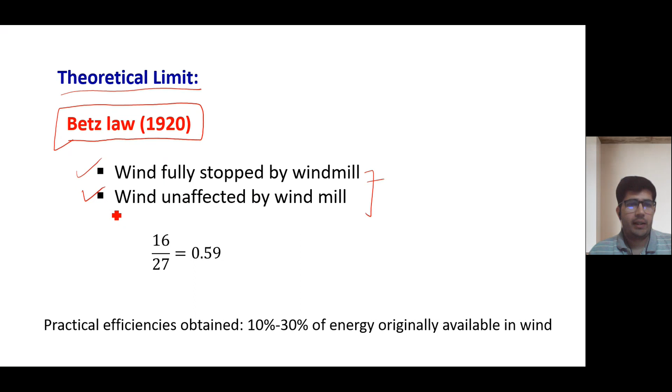So the value is 16 upon 27, which comes to 0.59. So there is a theoretical limit of 59%. Whatever equipment, whatever windmill, whatever the conditions, you cannot get more than 59% of wind energy. Suppose your wind is having 100 watts of energy, then you can only tap off around 59 watts of energy.

So you can only tap off 59% of the total available wind energy, but practical efficiency obtained is around 10 to 30% of the energy originally available in the wind, because we have other efficiencies due to the fan part, the location, and various other things. So this is the maximum; mostly we are getting 30 to 40% efficiency, or sometimes 10 to 30% efficiency.

So it's important, 16 by 27 — it's a very important number, you should remember this. This is called the Betz limit: 16 upon 27, or you can say 0.59. We cannot get more than this efficiency from the windmills, or you can say the wind turbines.

So we know the Bernoulli equation: half rho v square plus rho g h plus p equals constant. Here P is the static pressure. Rho g is again, rho is constant, g is constant, and height is also constant because we are taking the wind at a particular height. This is a potential head. It's a dynamic pressure or dynamic head due to the dynamic term, half rho v square, where velocity is included.

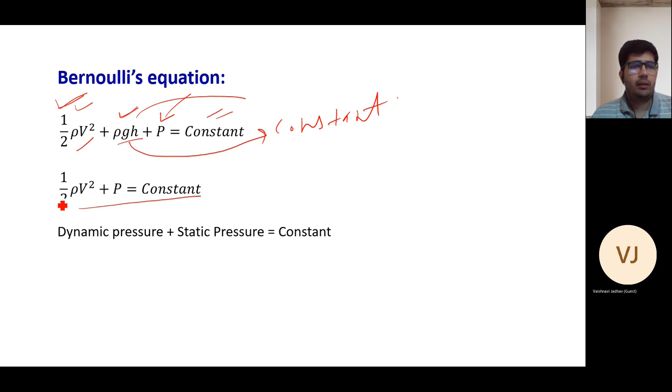So this part equals constant because we are dealing with the wind turbine, so the height is fixed. Rho g h can also be considered constant, so you can transfer rho g h to the right side and merge it with the constant. You will get half rho v square plus p equals constant — the dynamic pressure plus static pressure are constant. This is the basic equation, half rho v square plus p equals constant, for the wind energy calculation.

So further we will see it. These derivations are covered very well in the course class, so for detailed explanation you can refer to the class notes or class videos. We are just briefly looking at the derivation.

So suppose this is a control volume, and here is your blade. This side you can say V1, and this side V2, and these are sections just far behind and near the blade, so it can be considered as infinity — this one also like infinity. Based on this, we can apply the Bernoulli equation on different parts.

So first, half rho V1 square plus P infinity equals half rho V square plus P before — that is the pressure before the wind turbine, and P after is the pressure after the wind turbine. For the after case, half rho V square plus P after equals half rho V2 square plus P infinity.

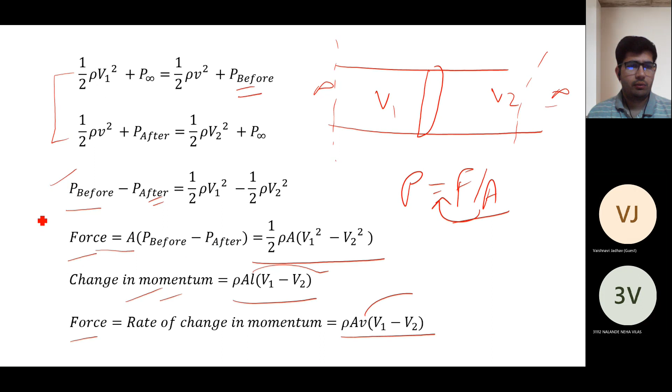This is the derivative with respect to L, or you can say the derivative with respect to time for the L, which converts to V. Now we are having two forces, from this equation, equation 1, and from this equation, equation 2. Now equate these two: rho A V, V1 minus V2, equals to half rho A, V1 square minus V2 square.

So we will get the velocity at the blade, it will be V1 plus V2, divided by 2. So these are the basic calculations.

The kinetic energy will be half rho A L V1 square minus half rho A L V2 square, because one side the velocity is V1, the other side is V2. So power will be dE by dt, and E is the kinetic energy.

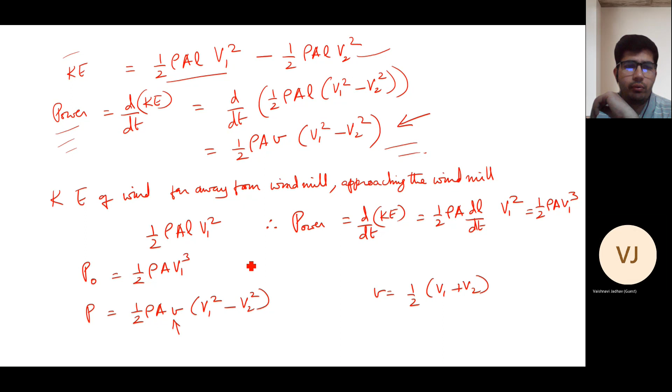So do the derivation with respect to T for the energy, and you will get this equation: half rho A V, V1 square minus V2 square. So the kinetic energy of wind for the windmill, you can get by putting the value of V here.

When you put the value of V, you will get this equation. After solving, I'm coming to the final equation. You will get this.

P upon P naught equals to half, 1 minus alpha square, plus alpha minus alpha cube. So alpha is the ratio of V2 upon V1.

Now for the maximization, if you do the derivative with respect to alpha and solve, we get alpha value equals to minus 1 and 1 by 3. So minus 1 is not possible, so it will be 1 by 3. So alpha will be V2 upon V1, and V2 upon V1 equals to 1 by 3. So for the maximum value, this will be this.

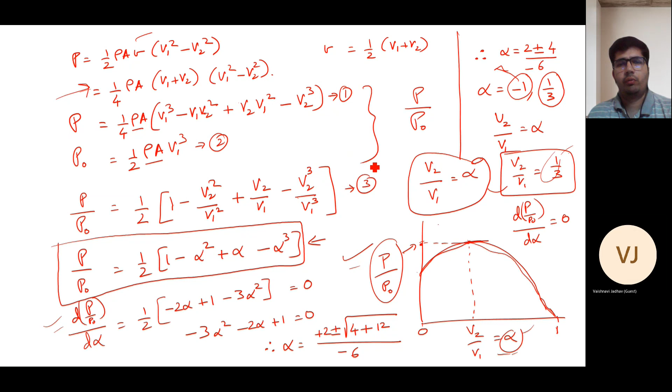So now from this point we find the Betz limit. You can say the change in energy in wind - we have already seen this - power extracted from wind is P, d by dt.

So the kinetic energy in incoming wind is half mv square, where m is the mass, v is the velocity. So it's half rho V, where velocity is V1, and V is the volume of air, so it's A into L, area into the length for the particular section. So the power in incoming wind will be P naught equals to half rho A V1 cube.

So it's important to note that the kinetic energy of the wind is proportional to the velocity square, but the power is proportional to the velocity cube. Remember this, it's useful. So kinetic energy, or the energy of wind, is proportional to velocity square, and the power is proportional to velocity cube.

Now, further solving for alpha equals to 1 by 3, we will get 0.59, 16 upon 27. So P upon P naught equals to 16 upon 27.

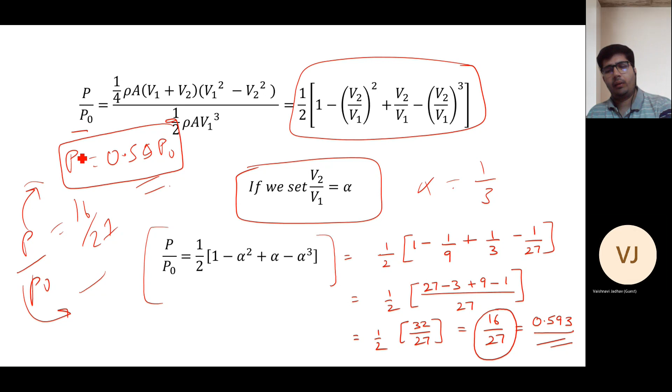So based on the data, we can draw this graph. Power from the windmill, or the power available in the wind, so P upon P naught, is on the y-axis. On the x-axis, we are having V2 upon V1. So we can draw this graph.

A particular value of V2 upon V1 equals to 1 by 3, or 0.33, gives the maximum value of 0.59. Before this, if the ratio is less than 1 by 3, it's increasing, and after this point, it's again decreasing. So this graph is also very important.

So the conclusion from this part is that the Betz limit indicates that only about 59% of the energy available in the wind can actually be captured. This is very important, that we can only capture about 59% of energy available. And the actual efficiency will be less than this limit. This is a theoretical limit, but when we are considering the other efficiencies of other equipments also, then the actual efficiency will be less than this limit.

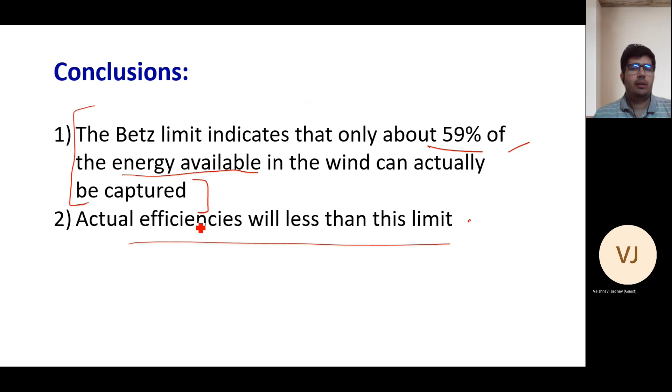Now we will see wind turbine parts. Wind turbine is made of different parts. Briefly we will cover some parts, and you can see here a basic diagram of a wind turbine. From the diagram you can see that it's a horizontal axis wind turbine, since the axis is horizontal.

So there are various parts, and they are named. The first is the rotor, you can see the rotor. Then the blade, then the tower at the bottom. One is the power cable, we are getting the power from the generator. There is a brake, gearbox, nacelle, and the anemometer, controller, generator, drive, and motor. So there are different parts, and briefly we will cover every part.

The first part is blades. There are different types, one being lifting style wind turbine blades. These are designed most efficiently, especially to capture the energy of strong and fast winds. Some European companies actually manufacture single blade turbines.

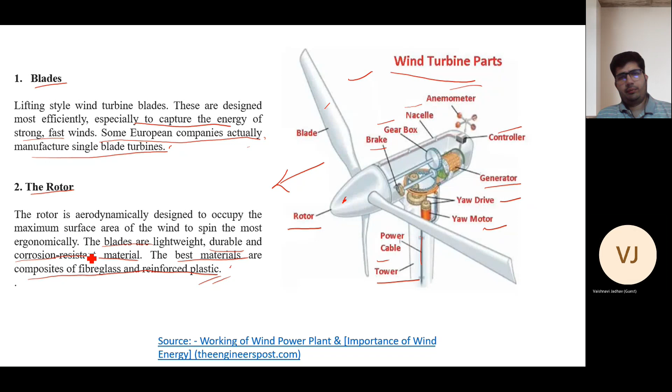Nacelle is a housing which contains all the components which operate the turbine. This complete housing, in which all the components are installed or placed, is called the nacelle. It is mounted on top of a tower and includes the gearbox, generator, low and high speed shafts, controller, and brakes. These are the major equipments included in the nacelle.

The nacelle is fitted with an anemometer and a wind vane. It provides housing for the low speed shaft, brake, gearbox, high speed shaft, generator, anemometer, and wind vane. So these are the major parts housed in the nacelle.

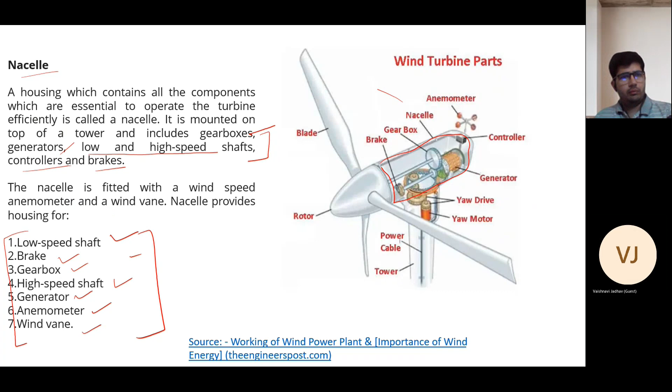So the rotation of the wind blades is low compared to what is required for the generator. Because if we want to generate electricity from the generator, the generator shaft should be at very high RPM, but the wind turbine blades rotate at low RPM. So we need a system that can convert the low RPM to high RPM, and that is why we use this gearbox. You can see the shaft.

You can see these blades are connected to the rotor, and the rotor is connected to a shaft. That shaft is connected to a bigger gear, and this bigger gear is in connection with a small gear to the generator. So when the shaft rotates, this big gear rotates, and the small gear, which has a smaller diameter, rotates more for one rotation of the big gear. So in this way we can control the rotation using the gearbox. We can design the gearbox for our requirement, converting the required RPM of the rotor shaft to the generator.

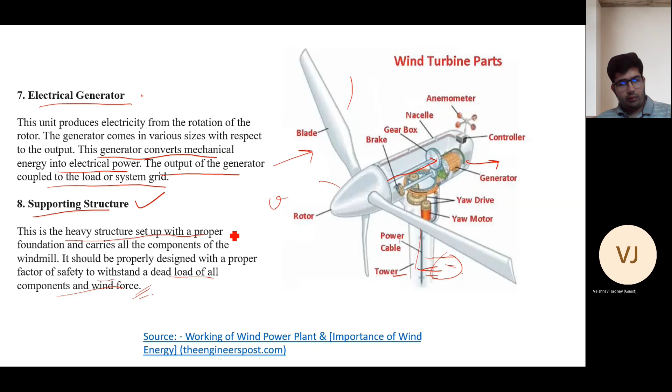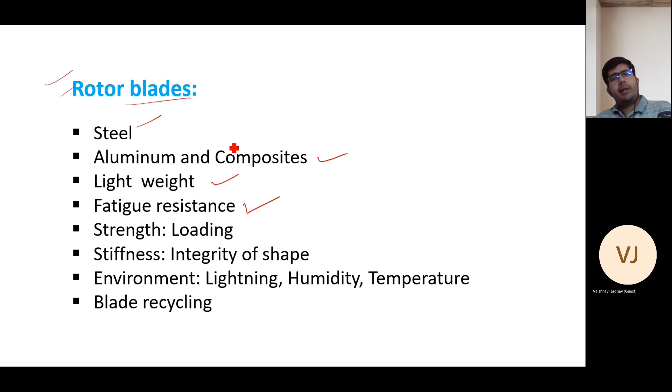Now the rotor blades. Rotor blades are made of steel, maybe aluminum, and composites. They should be lightweight and fatigue resistant, because with three blades installed on the tower, when a blade is in front of the tower, the force on that blade will be different than when the tower is not behind it. So there will be high stress loading and low stress loading - a cyclic loading phenomenon. So there should be fatigue resistance among the blades, otherwise fatigue failure will occur. Fatigue means the component fails before the design loading is reached. The blade should have strength so it can sustain the loading, and should have high stiffness to maintain the integrity of its shape.

So the shape of the blade will not change if the wind force is very high—the shape remains same. The environment factors like lightning, humidity, and temperature matter too. The material of the blade should be such that it can sustain lightning, humidity, temperature, and various environmental factors. Blade recycling is also important.

Blade material should be such that when the wind turbine completes its life cycle, we can recycle the blades and make new blades out of it, or use that material. So the material should be able to recycle.

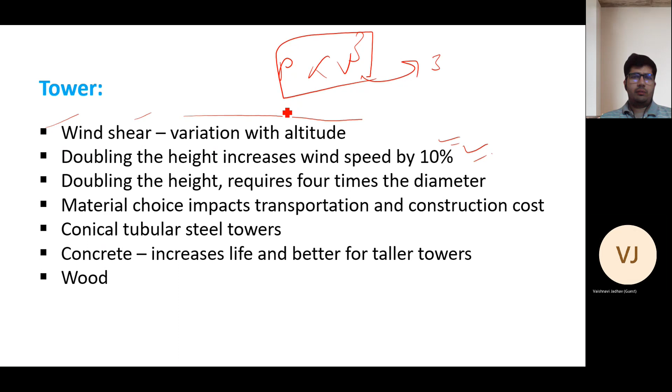Doubling the height increases wind speed by 10%. We have already covered previously that power is proportional to V cube. So if your height is doubled and speed increased by 10%, then the power will be increased by more than 10 to the power cube, to more than 30%. So power will be increased by 30%.

So a small change in wind speed causes a large change in power. This is very important because for increasing the height, you just need to install a strong, sturdy tower. If you are able to install a long sturdy tower, you get more power. Doubling the height requires 4 times the diameter.

If you are doubling the height, then the diameter requirement is also more. The material choice impacts transportation and construction cost. Whatever material you are choosing, you should also consider the transportation and construction cost.

Conical tubular steel towers are quite famous. Concrete increases life—you should increase the concrete also, as it increases life and is better for taller towers. It gives good strength for up to 40 to 50 years, which is very good for the wind turbine life cycle. Today, with the help of technology, we are using good designs for the tower too.

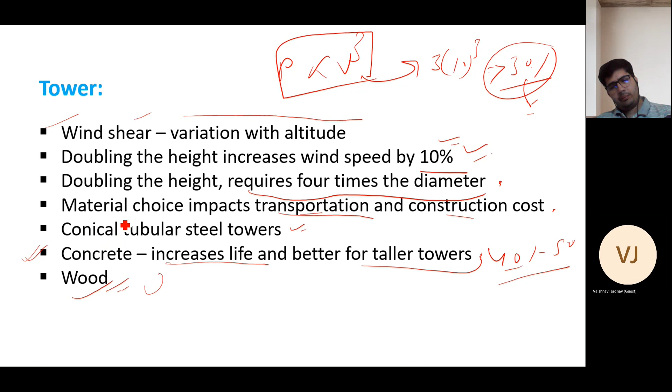Now the hub. The blades are directly bolted onto the hub—the hub is the part where all the blades are bolted. Blades are bolted to the pitch bearing, which is bolted to the hub. So there is a part called pitch bearing: the blades are bolted to the pitch bearing, and the pitch bearing is bolted to the hub.

Now the gearbox. The gearbox connects the shaft from the blades to the generator. We have seen in the diagram that the gearbox connects the rotor shaft to the generator, converting the low RPM of the blades to the higher RPM the generator requires to generate electricity, since the blades have low RPM.

Today, there are gearless direct drive designs also being considered, and research is going on in this sector. If you use the direct design, not using the gearbox, there will be speed fluctuation. So more magnets are required for the desired frequency.

Suppose you require a particular frequency of electricity—if your RPM is less, you require some other parameter, so you have to generate more magnets, apply more magnets. So more magnets will be required for the desired frequency.

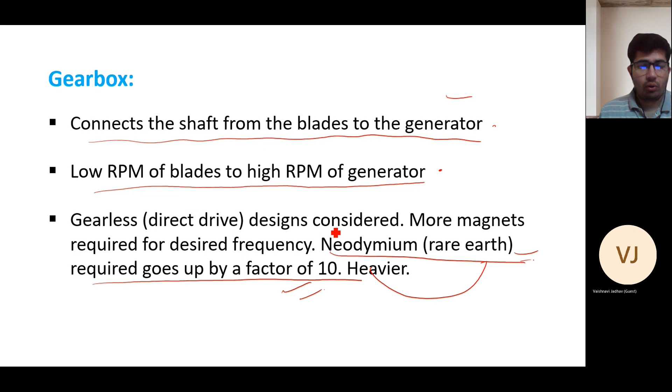Neodymium is a rare earth material. Its requirement goes up by a factor of 10. If you are using the gearless drive, the use of neodymium will be increased by a factor of 10. Since it's a rare earth material, we need to consider this area because it's increasing the cost, and also it's difficult to procure.

So we need to look into it—its size, and it will also be heavier because more magnets are required. So 10 times the neodymium is required, and the weight will increase so much. Based on the increased weight, we also have to look into the tower design and all other aspects. So whenever we design, we have to check all the parameters.

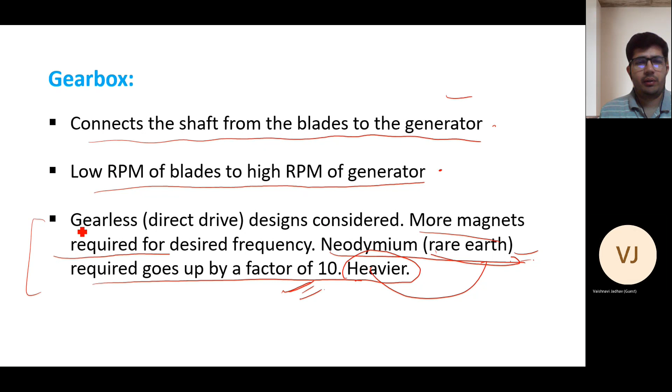Now general materials which are used in the windmills. So for the rotor, glass fiber reinforced plastics are used, because we require high strength and fatigue resistance. This glass fiber reinforced plastic gives high strength and fatigue resistance to the rotor and blades.

The nacelle is used for drives, blade pitch change, coolants, brakes, bearings, shafts, controllers. These parts are housed in it, and it's made of steel or aluminum.

For the gearbox, we are using epicyclic gears. Research is going on to eliminate the gearbox, but the size is also increasing.

For the generator, we are using permanent magnets or copper windings. For the tower, we are using pre-stressed concrete or steel for manufacturing.

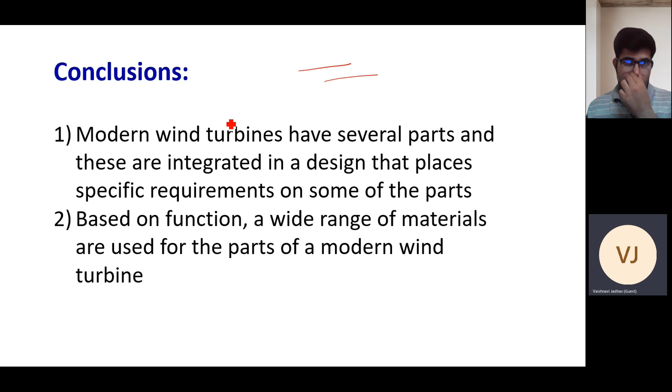So the conclusion is that modern wind turbines have several parts, and these are integrated in a design that places specific requirements on some of the parts. Based on function, a wide range of materials are used for the parts of a modern wind turbine.

More research is going on in wind energy because all over the world we are focusing on increasing the renewable energy part in our main energy supply. So we are looking towards renewable energy sources, and wind energy is a major part in that. So we are focusing on various different blade designs, materials, and how to increase the efficiency.

As of now, we know the theoretical limit is 59%, but with the current technology, we are only achieving 10 to 30% efficiency. So research is going towards increasing the overall efficiency and getting as near as we can to 59%. Research is going on in that area.

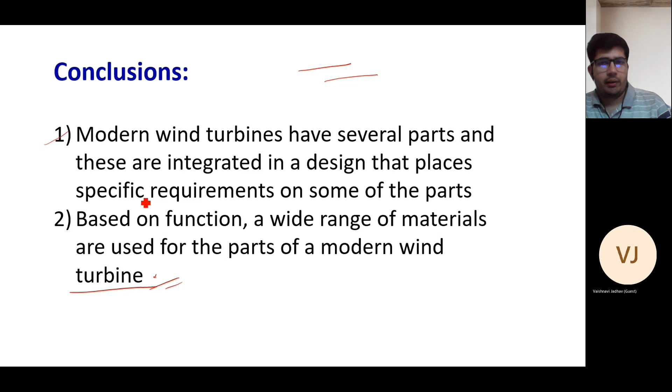When the blades are rotating at angular velocity omega, the linear velocity v will be omega r. So the tip speed ratio is lambda equals v tip upon v wind, where v tip can be omega r upon velocity of wind.

If the velocity of wind is more than the tip velocity, then lambda will be less than 1. If the velocity of the tip is more than the velocity of wind, then lambda will be greater than 1. The value of lambda is very important when we are considering the wind turbine design.

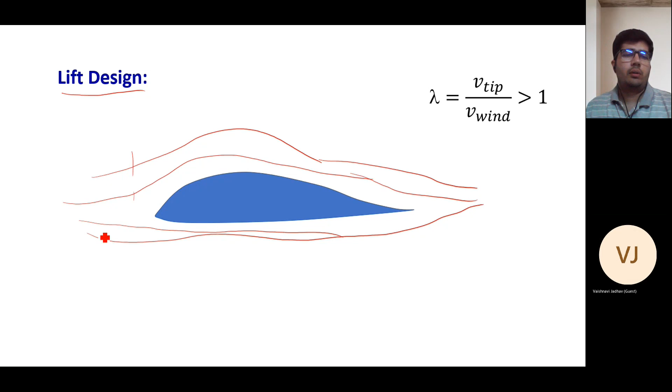Consider two sections, one or two. The wind is going like this, so there are two points before the airfoil. After the two points, the velocity will be different on both sides, at the top and the bottom, because the air particle on the upside has to cover more distance compared to the lower path. If they arrive at the same time on the outer side, it means the upper part is traveling with a higher velocity compared to the lower part.

So there will be a pressure difference across the top and bottom. The pressure will be more at the bottom side compared to the upper side, so the lift force will be generated and this will try to go in the upward direction. In this case the tip velocity is more than the wind velocity. For more detail on this calculation, you can refer to the professor's class notes. So lambda equals v tip upon v wind, and the tip velocity is more in this case compared to the wind velocity.

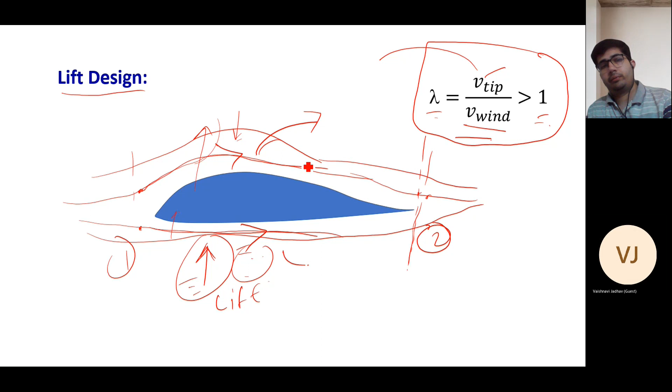So the lambda value will be greater than 1. Now there are two types of turbine: horizontal axis turbine and vertical axis turbine. For this turbine, the V tip is greater than V wind, so lambda is greater than 1.

Now for this turbine we will see. So for the vertical axis turbine, you can see this is the design. So the major role here is the drag force. In the horizontal axis turbine, the lift was working there for the rotation of the blade, but in this case, the drag is

playing the main role in the rotation. So you can see that if the wind is flowing like this, more air will come in, and this air will push this part of the blade in this direction, so the blades will be rotating in this direction. So in this case, the velocity of wind will be more as compared to the tip velocity, so the lambda value will be less than 1.

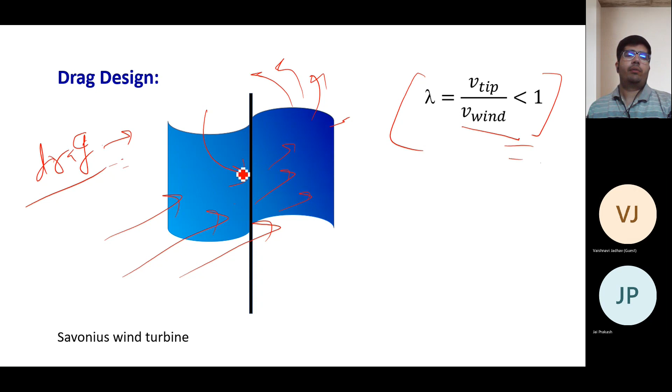So you can say for the lift design, lambda will be greater than 1, and for drag design, lambda will be less than 1.

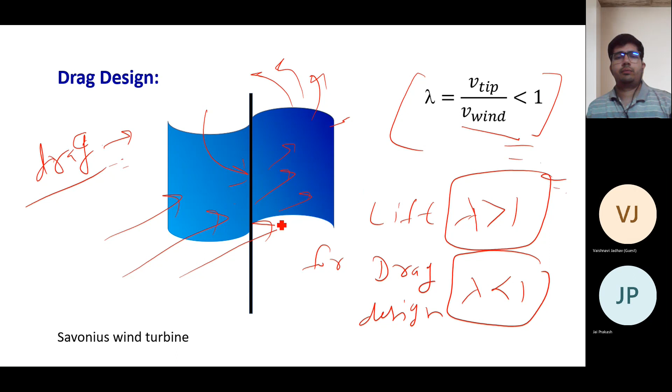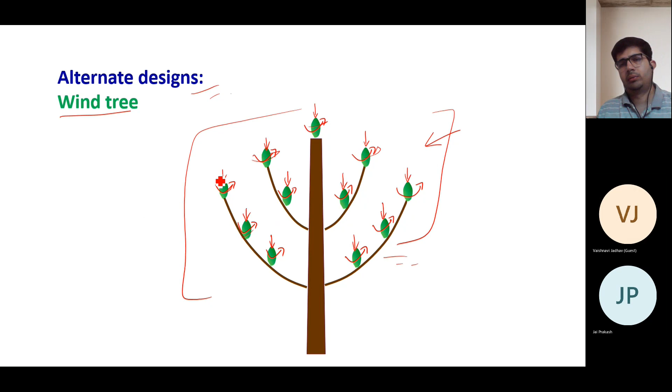So the conclusion from these slides is that the lift based design is more efficient than the drag based design, and lambda is greater than 1 for lift based design. For power generation, RPM is important because generator works on RPM, and even one blade may be sufficient. For other mechanical purposes, torque is important, and multiple blades may be desirable.

So if we are only looking for RPM, then we can go for one blade that will have more RPM but less torque. If you also require torque, then we can have more blades, so the torque will be there and the RPM is also there. So it depends on the requirement and the other components available design.

The third point is that interesting alternate designs are available for wind energy capture. So we have seen this tree design, which is also very interesting. In this way, we can design different types of wind turbines.

Now let's see some questions. The first one is the formula for calculating the wind power. So what is the formula for calculating the wind power? Just take 2 minutes and try to remember. We have covered this in our slides, and the professor has also covered it.

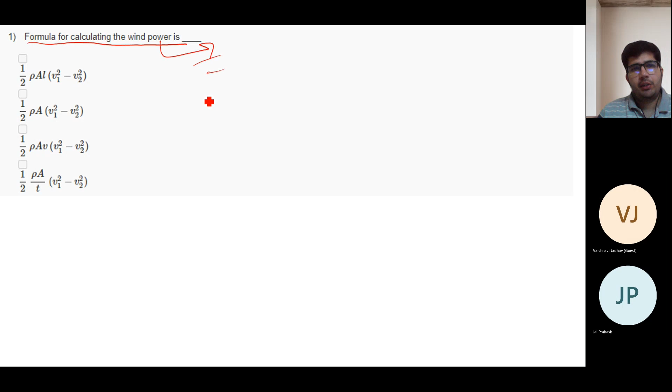So I have already mentioned that power is proportional to V cube. So basically you can compare the units of all these options. Wind energy is proportional to V square, but the power is proportional to V cube. So now try to find out the correct answer. You can find out

in which option there is a V cube possible. In the third option, half rho A V, V1 square minus V2 square. Yeah, right, so this option is correct. So the correct answer is half rho A V bracket V1 square minus V2 square.

For detailed explanation, you can see the previous slides and the class notes, but we can discuss briefly. Option A will not be correct, because you can see half rho A L V1 square minus V2 square just by knowing. If you're not remembering the complete derivation, if you know that power is proportional to V cube, you can balance the units. So in this option, we can see that power is proportional to V square only, because A is area, L is the length, so there is only V square there.

So it will be the wrong answer. Now the second option is again half rho A, V1 square minus V2 square. Again you can see that power is proportional to V square in this option, so this will also not be correct. Now in this option we can see V and V1 square minus V2 square, so for velocity there are three parts, so the total unit will be 3. So here the power is proportional to V cube, so it can be the correct option.

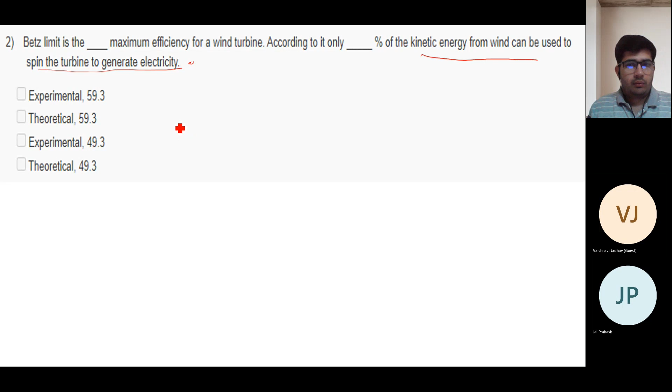Second option: it is the theoretical maximum efficiency and 59.3. We will check. Let's wait for one more minute because some people will need it.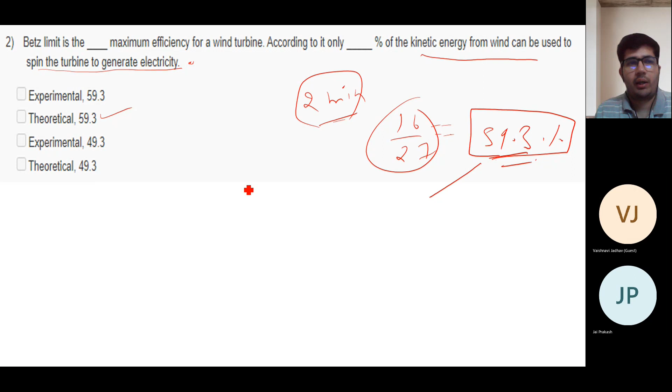But in the options, the answer is written in decimal form. You have to convert it into decimal. It will come around 59.3%. So the theoretical limit is 59.3%, and it was given based on the theoretical principle, not the experimental principle. It was given by the basic energy conservation formulas, based on the basic theory. So Betz was the first who gave this limit, that's why it's called the Betz limit.

So Betz limit is the theoretical maximum efficiency for a wind turbine. According to it, only 59.3% of kinetic energy from wind can be used to spin the turbine to generate electricity. So the correct answer will be B.

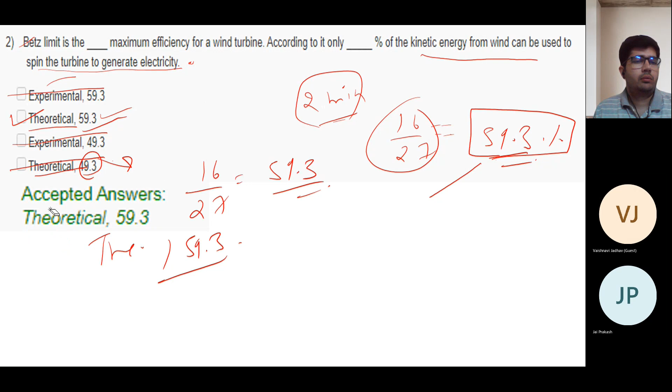Option A will be incorrect because it was not experimental. Again, experimental is incorrect. Option D is saying theoretical, but the data is 49.3. But we know, if you remember 16 upon 27, it will come to 59.3. So this option is also incorrect. So the correct answer is B, theoretical, and 59.3. This is the correct answer.

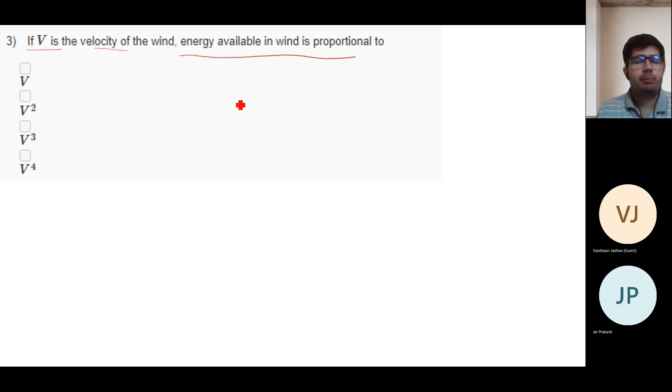Question number 3. If V is the velocity of the wind, energy available in the wind is proportional to. Just read the question carefully - what is mentioned, is it energy or power? Don't confuse between those terms, both are different. Based on that, try to find out the answer. Options are V square, V cube, and V4. Just take 2 minutes and give the answer.

Should be V square. Yeah, V square. Okay, we will see.

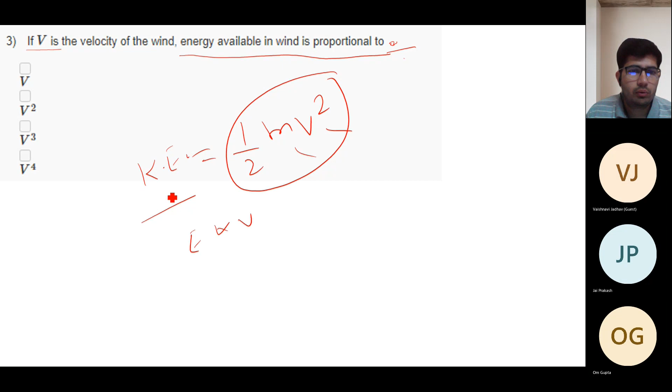Just try to remember, it's asking for energy. V is the velocity of wind. So whenever there is a velocity and we have to find out the energy, the first thing that comes to mind is kinetic energy. Based on the kinetic energy principle, maybe you can relate the options. We know kinetic energy is half m v square. Wind is flowing with a velocity v, and there is some mass of wind, so we can see the energy is proportional to v square. If it was mentioned as power, then it would be v cube, but since it's mentioned as energy, the correct option is v square. Option A will be incorrect, C will be incorrect, D will be incorrect. So the correct option is v square.

Now, question number 4. If the wind velocity is 20 kilometer per hour, then the tip velocity can be 60 kilometer per hour. Is this statement true or false? And what is the reason? In which case can it be, like for horizontal turbine or for vertical axis turbine? Let's take 2 minutes and try to give the answer.

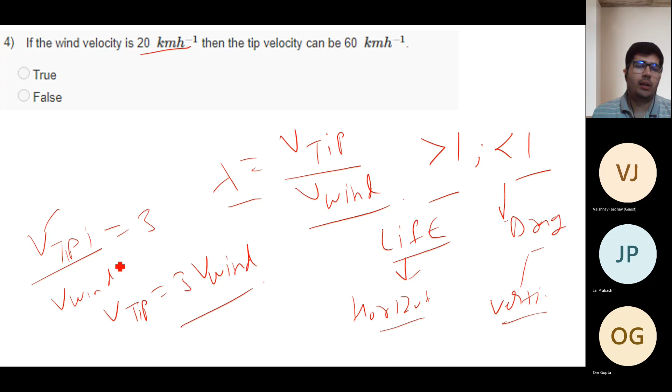So if the V tip, or tip speed ratio, is greater than 1, suppose this ratio is 3. So V tip upon V wind equals 3. So the tip velocity will be 3 times wind velocity. So if the wind velocity is 20, then the tip velocity can be 60, because lambda is greater than 1 and lambda equals 3. So based on this calculation, it is possible.

It's possible, then the statement is true. Don't be confused about how the tip velocity can be greater than this, because by the design of aerofoil structure, blade designs, and all design parameters, it can be possible. The correct answer is true.

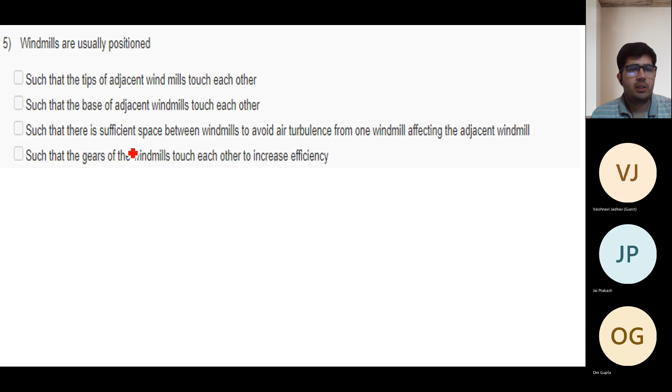Question number 5: Windmills are usually positioned - Option A, such that the tips of adjacent windmills touch each other. Option B, such that the base of adjacent windmills touch each other. Option C, such that there is sufficient space between windmills to avoid air turbulence from one windmill affecting the adjacent windmill. Option D, such that the gears of the windmills touch each other to increase efficiency. Take 2 minutes, recall the basics of windmill design, and try to give the answer.

Sir, third option. Option number 3 is that there is sufficient space between windmills to avoid air turbulence from one windmill affecting the adjacent windmill. Yeah, it looks correct.

Let's see, just wait one more minute. Let's check if any other option is also correct, because it is not mentioned here that only one option is correct, or more than one option is correct. So a simple reminder: in any assignment question, if it is not mentioned that only one option is correct, maybe more than one options are correct. So if you are in a hurry and you just answer one option thinking your answer is right and you'll get full marks, that is not the case.

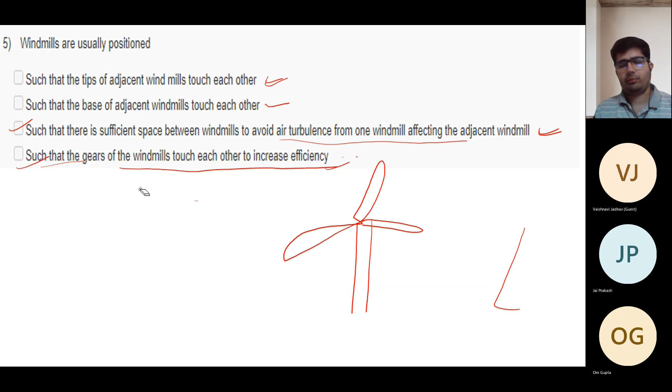The correct answer is option C only.

Lower RPM at blade and higher RPM at generator. Yes, correct - low RPM at blade, higher RPM at generator. Let's wait one more minute if anyone wants to answer or think about it.

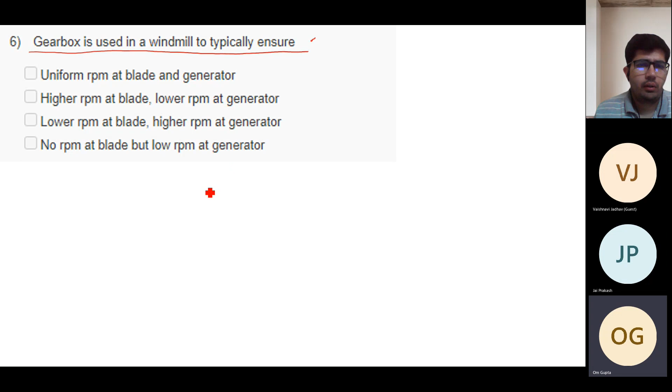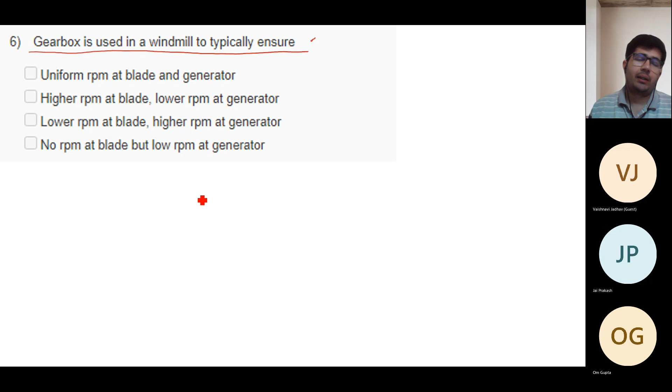More magnets will be added in case you want to generate electricity at a lower frequency, at lower RPM. So you have to match the frequency - that's why you add more magnets. But the velocity of the blades will be higher in the lift type.

In drag type, we know the lambda value is less than 1, so the velocity of the blades will be lower - not higher. In this case, you absolutely need the gearbox. When lambda is greater than 1, based on the design of the number of blades, we can get higher speed. At higher speeds, we can generate electricity by just configuring the generator, so that case is possible - and it is possible only with the horizontal axis turbine, not the vertical axis turbine, because there lambda is 1.

So this option would be higher RPM at blade, low RPM at generator - but it will not be correct because the generator requires higher RPM. So the main purpose of the gearbox is to increase the RPM.

That is under research - increasing the number of magnets is fine, but that is a part of ongoing research we are looking forward to. As of now, we are not using those options, because we have to use rare earth materials that are not easily available, and the cost is also very high. That's why we are just using the basic gearbox, where the low RPM at the blade will be converted to the higher RPM at the generator.

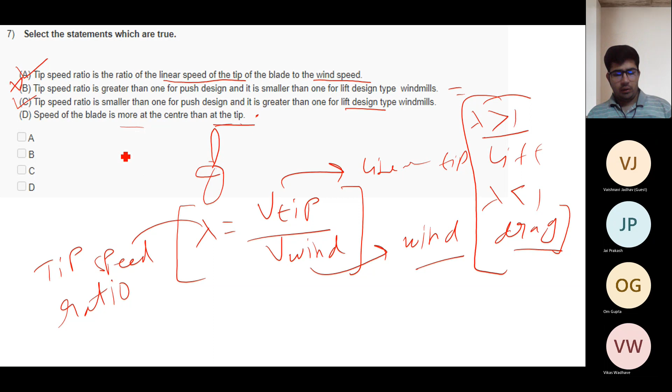Check option D: speed of the blade is more at the center than at the tip. At the center, we know there is a rotor, or you can say hub, there. All blades are attached to this rotor. So is it possible that the velocity at the center is more than at the tip? No. The speed of the blade is more at the tip side. So this option is also wrong.

So let's see what are the correct options. A and C. Okay, so the answers are A and C.

Come to question number 8. The question is, what is the significance of 3 blades in a windmill?

Option A: in comparison to 1 blade, 3 blades are used to increase the interaction with the wind. Option B: better suited for generating high torque. Option C: distributes the load on the shaft more uniformly than a 1 blade windmill, especially with respect to wind turbulence near the tower.

Okay, so try to recall the class notes and our previous slides and try to find the answer. Take 2 minutes.

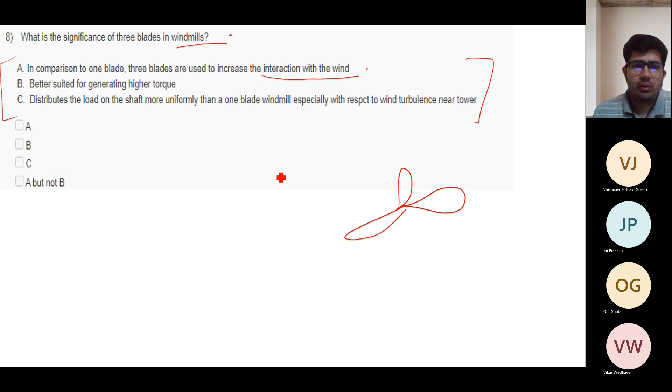So option A is: in comparison to 1 blade, 3 blades are used to increase the interaction with the wind. Yeah, if more blades are there, it means they are capturing more wind, so they are having more interaction with the wind as compared to the single blade. So this option is correct.

Second, better suited for generating higher torque. If three blades are there, it means the speed will be low as compared to a single blade. If the speed is low, it means it is having higher torque. And with three blades, they will generate more torque also, while the speed will be less as compared to the single blade. So yeah, it's also correct: better suited for generating higher torque.

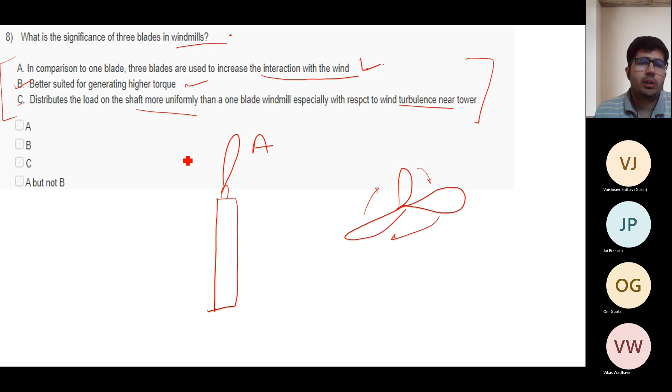The third one: distribute the load on the shaft more uniformly than a one blade windmill, especially with respect to wind turbulence near the tower. We have covered this, I think. This is the tower. So if you are only having one blade, when this blade is at position A versus position B: at position B, the tower is behind the blade, and at position A there is no tower behind the blade. Due to the tower behind the blades, the velocity of the air changes. So the loading, the force by the wind, will be different on both A and B locations. This will make a cyclic loading, and cyclic loading will be the reason for fatigue failure. So we don't want this type of loading.

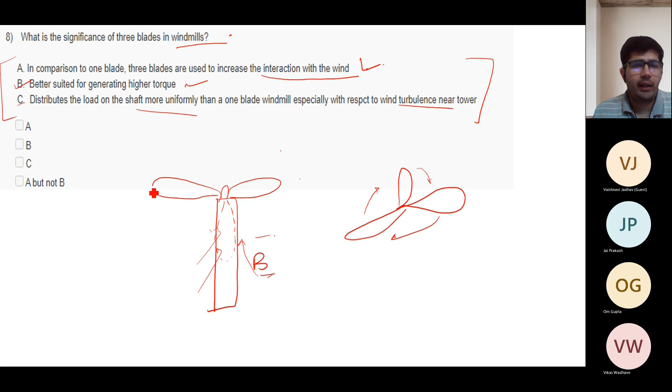So what do we do? We apply three blades. Now what happens? Now there are three blades, and when one blade is at position B, then there are two other blades balancing the loading. So every time a blade is in front of the tower, there are two blades to balance the loading, making the load more uniform as compared to one blade. So it distributes the load on the shaft more uniformly than a one blade windmill, especially with respect to wind turbulence near the tower. So yeah, option C is also correct.

So the conclusion is that option A is correct, B is correct, and C is correct. So all three options are correct. The correct answer is A, B, and C.

Question number 9: horizontal axis wind turbines. Options are: access stronger winds and are often mounted on tall towers; usually have blades that are pushed by the wind for only part of their rotation; capture wind energy throughout rotation. Just take 2 minutes, try to go through every option and try to answer.

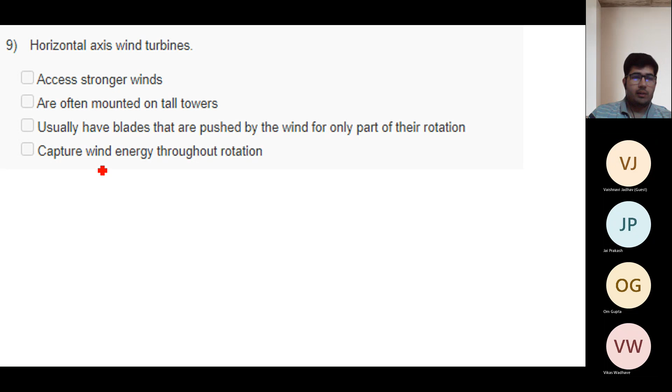So okay, let's discuss the answers. The first one is 'access stronger winds.' So yeah, this option is correct because horizontal axis wind turbines have three blades or more.

And these are located on a high tower. The radius of the blades is also high, so they can handle stronger winds. So option one is correct.

Option two: 'often mounted on tall towers.' Yeah, it's also correct because horizontal axis turbines are mounted on tall towers, in the range of 80 to 100 meters, maybe more — it depends, maybe around 60 to a hundred-some meters.

Option: 'usually have blades that are pushed by the wind for only part of their rotation.' Yeah, I think one of you was saying this option is correct, so just reread this option: usually have blades that are pushed by the wind for only part of the rotation.

So by the definition, 'pushed' and 'part of rotation' — if we compare this with the horizontal axis turbine, we find that every blade is interacting with the wind in all rotations. It's not that for one cycle, one blade interacts with the wind and the other two don't, or two blades interact and the other one doesn't. So this is not the case with the horizontal axis wind turbine — this part is also not true.

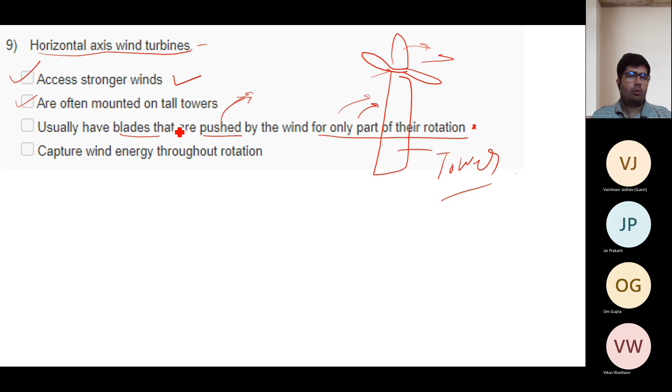Second, 'pushed' — we know the horizontal axis turbine works on lift, not on the drag concept, so it's also false. Based on this, 'usually have blades that are pushed by the wind for only part of the rotation' is possible for the vertical axis wind turbine, because in a vertical axis wind turbine, we have a blade structure like this.

So one blade will be pushing, but the other blade is not taking part in the rotation. Only one blade is taking part in the rotation. So this statement of option C is correct for the vertical axis wind turbine, but it is wrong for the given horizontal axis wind turbine. Is it clear?

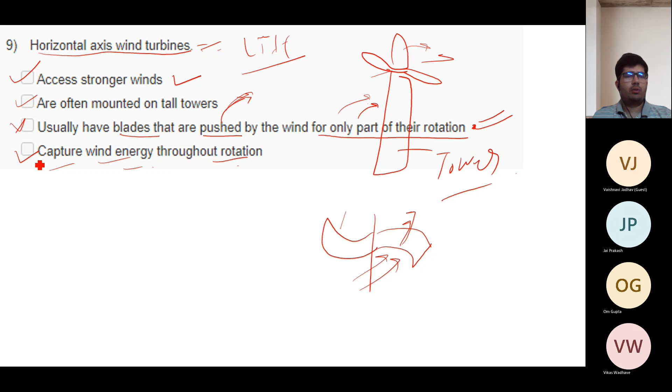Yes, clear. Now option D says capture wind energy throughout the rotation. As we have already discussed, in the horizontal axis turbine, all the blades are having interaction with the wind all the time in every rotation, so they capture wind energy throughout the rotation. Option D is also correct. So let's see the correct answers: access stronger winds, often mounted on tall towers, and capture wind energy throughout the rotations. So A, B, and D are correct.

Question number 10. Where and why is the pitch bearing used in windmill setup? So it's about the pitch bearing. Options are: blades are attached to it, hub and blades are linked using this, it reorients the blade, it increases the RPM. Try to go through all the options, try to think about the pitch bearing, and recall the previous classes or today's class.

Take 2 minutes to answer. Option B and option D is correct. Option B and option D. Okay, we will see. Meanwhile, you can go through other options also, maybe they can also be correct.

Option B and option C. Option B and option C. So today we are having conflict between the candidates. Okay, let's see, A is also correct. Again, we have a new answer. A is also correct, yeah okay. Try to go through all the options. Take one more minute because we are having conflict among the answers. Let's see.

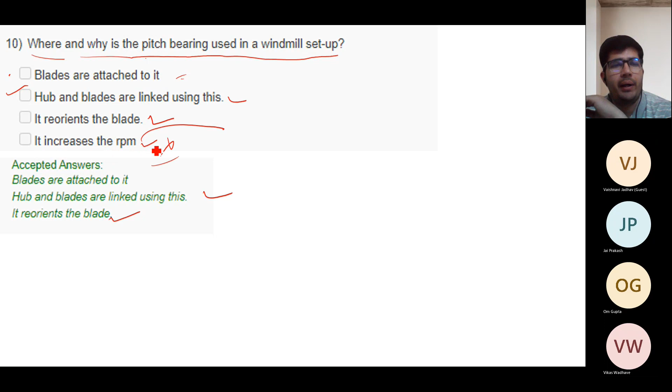Actually, the correct options are: blades are attached to it, hub and blades are linked using this, and it reorients the blade. So we all agree with option B, that hub and blades are linked using this. Correct, it reorients the blade, we agree. It increases the RPM - I think one of you said option D is also correct. So it is not, because the RPM increasing is depending on the gearbox. The gearbox is increasing the RPM. So option D is wrong, totally wrong, because the gearbox increases the RPM. Now what about option A? Blades are attached to it - yeah, that is obviously required.

That is how it is. Blades are attached to the pitch bearing, and pitch bearing is attached to the hub.

If hub and blades are linked using this, then it means that they are attached to the blades. Now blades are attached to it. Option B is correct, and option A is automatically correct. So option A, B, and C are correct. Actually, pitch bearing blades are attached to it, hub is attached to it. It's a link between the blades and the hub, and it reorients the blade.

Suppose, I wanted to say the question word by word. If you read and say why and where the bearing is used - where means it is between the two, and why it is to reorient the blade.

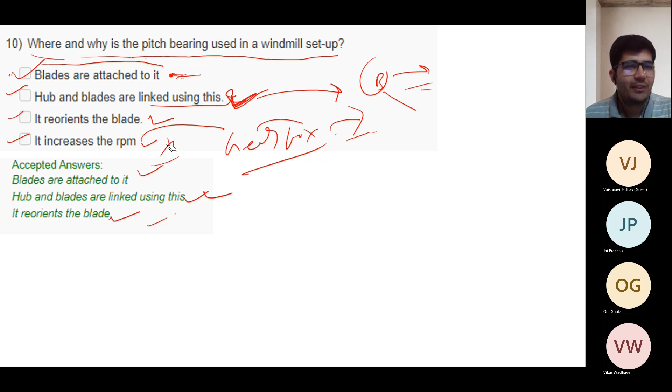So that's why I was saying just re-go through all the options. I think today's class is very good actually, we are having different opinions. It's nice to interact with you all. So I think now it's clear to you. Is it clear to all of you? Yes, sir, it's clear.

The question number 5, in which you are talking about the energy linkage with the velocity. Question number 5? No, you mean to say question five or six? No, before that, question number 3.

So, like you say it's not kinetic energy because energy is available. See, v is the velocity of the wind, and Mr. Haridas proved it - that the energy from the wind is related to the velocity with the cubic ratio. And he has used examples and proved it also, but that was for power.

Again, power - don't confuse between the power, which is the rate of energy delivery per second, and energy. So power is connected to V cube. That is the catch in this question. Power is energy per second. Okay, I got this.

dE by dt is the power, proportional to V cube. But the energy is the kinetic energy only in the wind, so that is proportional to V square. dE by dt will make it another V, so that dE by dt, with another V, will be proportional to V cube.

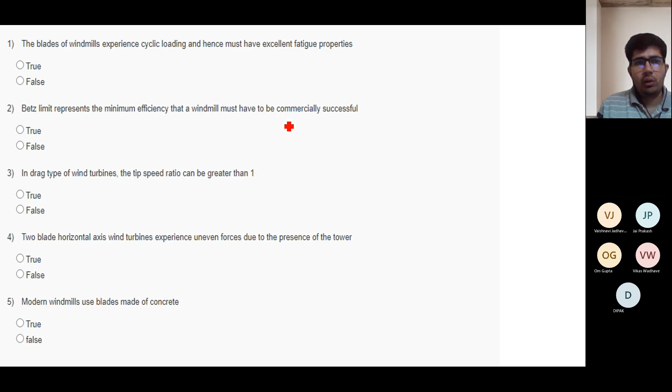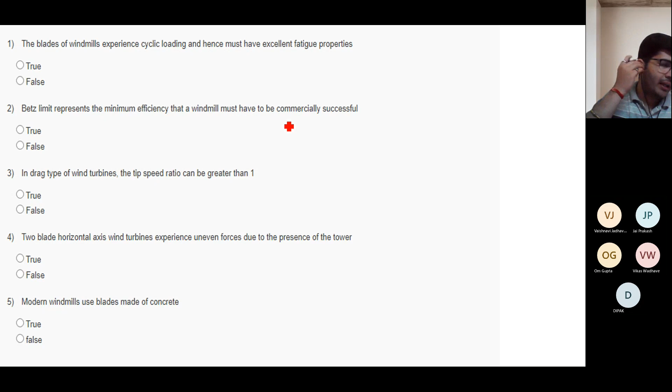So the blades of a windmill experience cyclic loading. As we have covered already, if we have a tower, and one blade is crossing the tower while the other is opposite to it, both locations will have different loadings. That forms cyclic loading, and cyclic loading creates fatigue. In fatigue, we know the material fails before its design limit. So we don't want to introduce fatigue in our material. We want to balance the loading so the cyclic loading is reduced, and if it is there, the effect is very low. That's why we design the blades accordingly. So it is a true statement.

The blades of wind turbines will experience cyclic loading and hence must have excellent fatigue properties. So the material should have good fatigue resistance or fatigue strength. So it is a true statement.

Option B, question number 2: Betz limit represents the minimum efficiency that a windmill must have to be commercially successful. Read the question carefully, try to recall the notes. Is it true or false? False, sir. It should be maximum, not minimum.

Whenever we see Betz limit, the first thing that should come to mind is 16 upon 27. Try to remember this figure. Betz limit is the theoretical maximum efficiency - this represents that only this much amount of wind energy can be captured. For windmills or wind turbines, this limit is very fundamental; it represents the maximum theoretical efficiency. So the question asks if this limit represents the minimum efficiency - that's incorrect, because it represents the maximum theoretical efficiency. So it will be false.

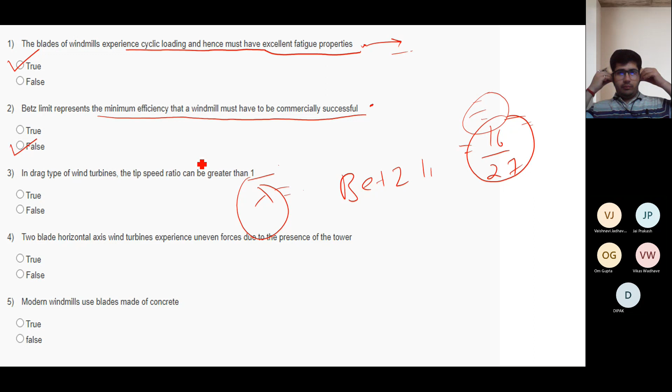Question number 3: In drag type wind turbines, the tip speed ratio can be greater than 1. Is it true or false? Just try to recall lambda for your hint. False, sir - it is smaller than 1. Okay, false, we will check. Just wait for 1 or 2 minutes.

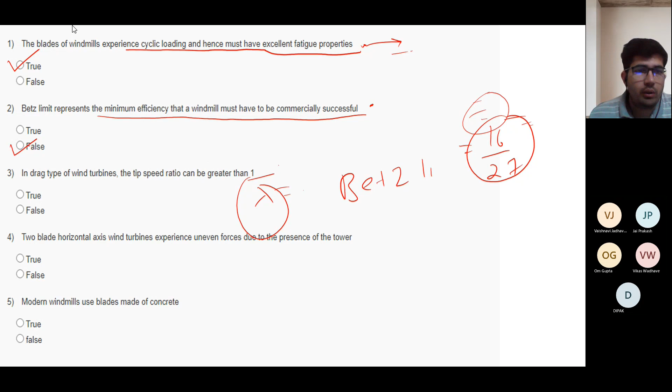We know the tip speed ratio lambda equals the velocity of the tip divided by the velocity of the wind. The tip speed ratio is greater than 1 for the lift type and less than 1 for the drag type. The statement says that for drag type wind turbines, the tip speed ratio can be greater than 1 - that is wrong, because for drag type it is less than 1. So it will be false.

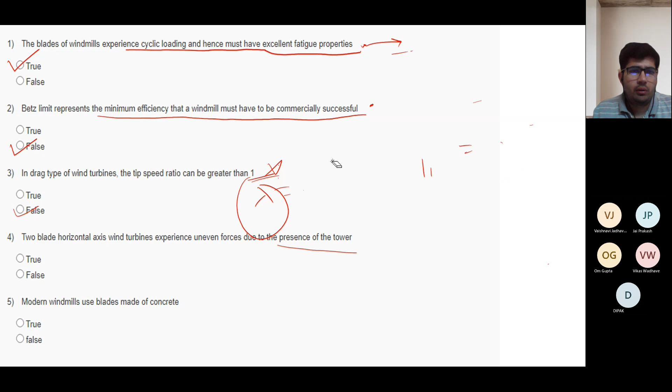Question number 4: Two-blade horizontal axis wind turbines experience uneven force due to the presence of the tower. Is it true or false? I think we have covered this many times, you can easily answer. Try to recall our discussion on fatigue, maybe you will get the answer. False. Anyone else having a different opinion?

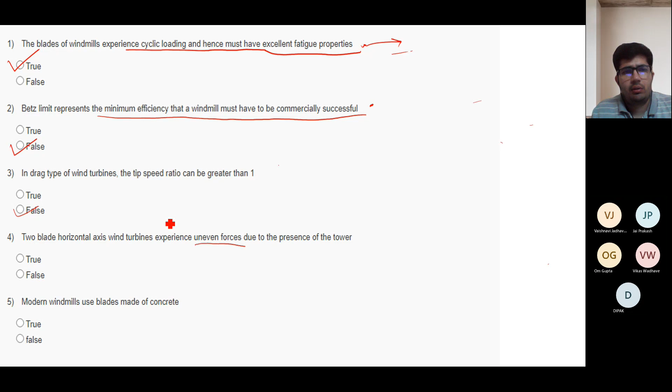Read the question carefully: a two-blade horizontal axis turbine experiences uneven forces due to the presence of the tower. This is, sir, true - because three blades will distribute the load efficiently, while with two blades, the presence of the tower makes the difference. So we are having two opinions for true and one for false. Whoever is saying false, please rethink, because the majority is saying true.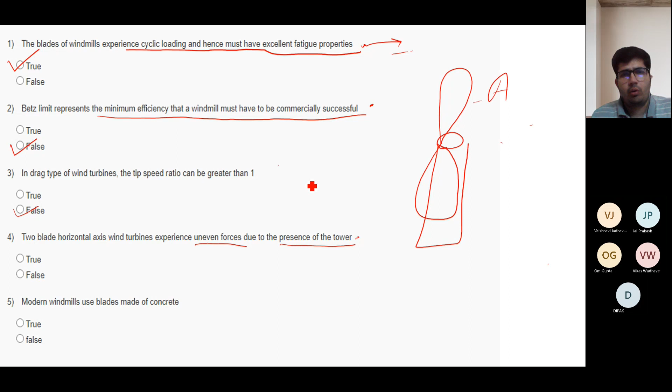No, it's directly opposite - it's not about the weight, you are not balancing the weight. We have discussed this already, but I will discuss it again. One blade is like this, one blade is like this - this is location A, location B. So one blade has the tower behind it, and one blade does not have the tower behind it. So in every moment this situation will come.

Yes, in one particular location it will not balance - that is the location where the tower is present, as mentioned in the question. So only at this location we are not dealing evenly. Yes, so now all three agree: the two-blade horizontal axis wind turbine experiences uneven forces due to the presence of the tower, because at location B the tower is behind, as compared to location A. At A the wind moves freely around the blade, but at B the tower blocks the wind after the blade, so the loading will be different. This generates the cyclic loading.

But if we are having three blades, then what will happen?

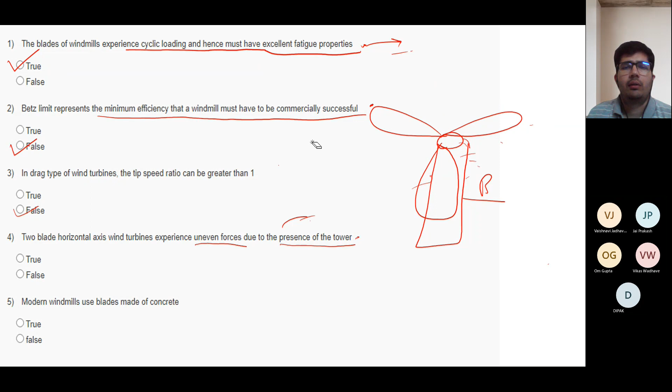The loading will be balanced by these two blades also, so now the unevenness will be decreased. It will not eliminate - don't think that three blades will eliminate the cyclic loading. No, but it will reduce the effect, so it will increase the fatigue strength of the material. The cyclic loading will be decreased.

The two blades horizontal axis turbine experience uneven forces due to presence of tower. It's a true statement. Question number 5.

Modern windmills use blades made of concrete. False - let's take 2 minutes. Never heard of concrete blades. Yeah, right, it's fiberglass or reinforced plastic.

And what is the purpose of fiberglass, if you can remember? Lightweight and good enough strength. Yeah, with strength. No, the major strength we are looking for in the blades - we have already discussed it in our previous question.

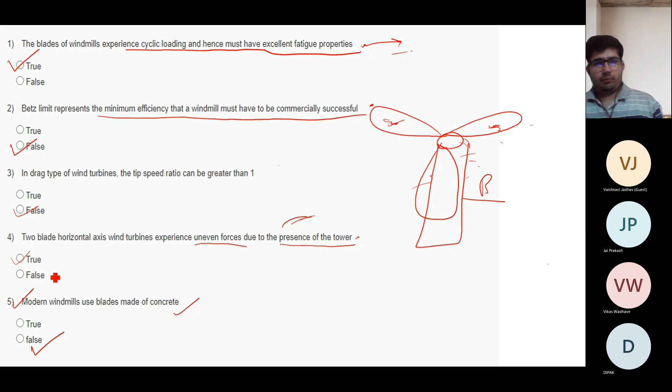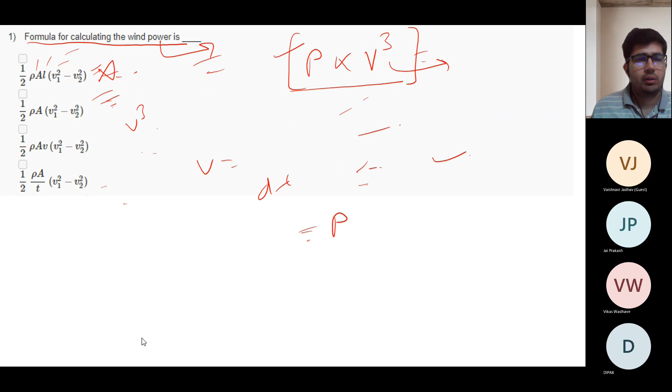Yes, okay. Now still we have 10 minutes, so quickly we can revise through the questions. If anyone is having any doubts, let me know. So this is question number 1. These are the answers, just take 1 minute. Anyone in doubt, let me know, we will discuss again.

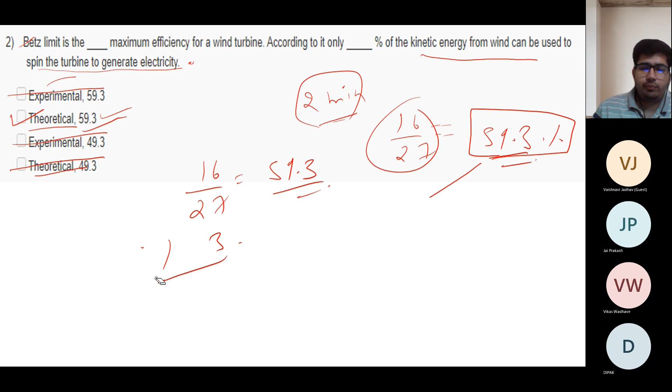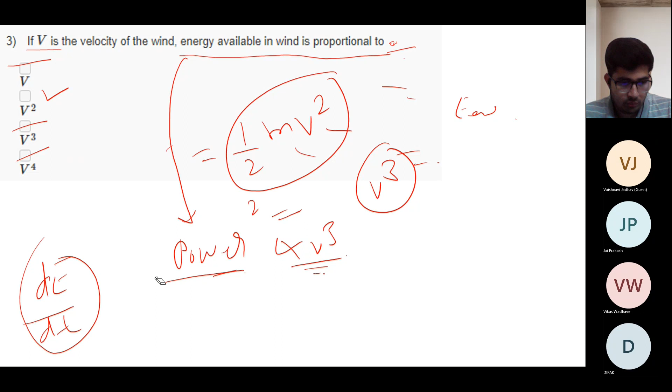Okay, I think there is no doubt for this question. So question number 2 is the answer. There's also no doubt. Question number 3. There is no doubt. Answer is V square.

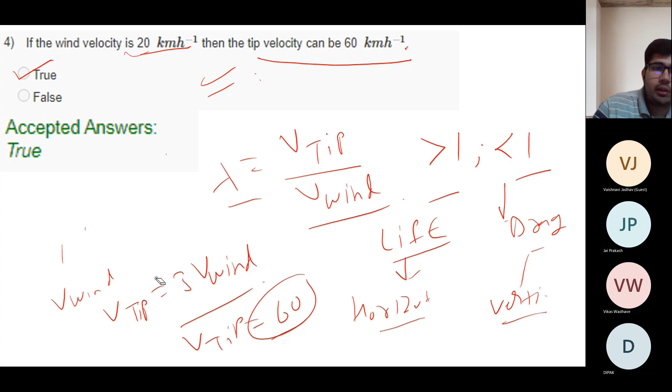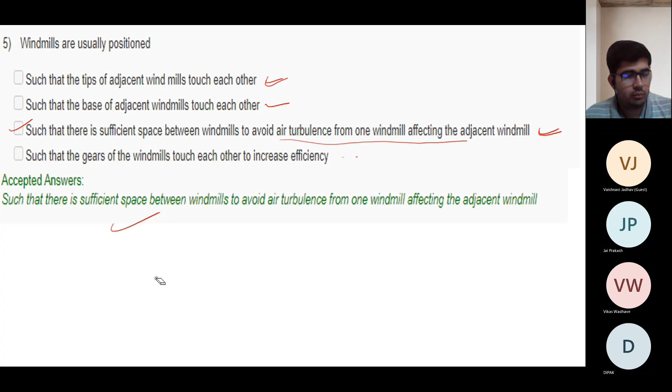Number 4. There is no doubt. Number 5. There is no doubt. Number 6. There is no doubt. Number 7.

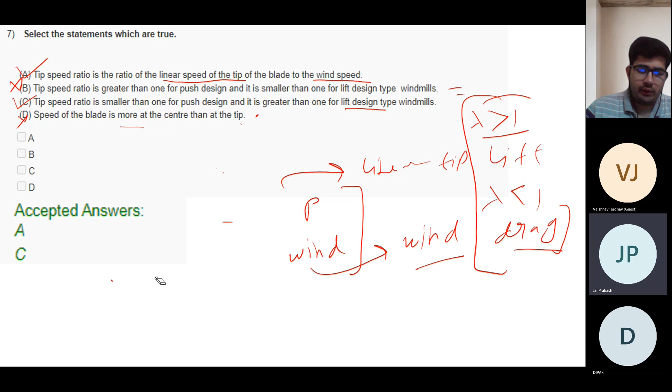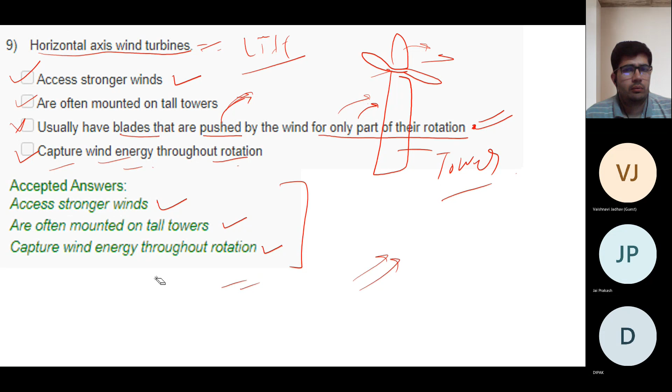Number 8. The answer - no doubt. Number 9 - doubts. Number 10 - out.

These are the answers for the quiz. Okay, I think there is no doubt. So also time is over, so I'm closing the slide.